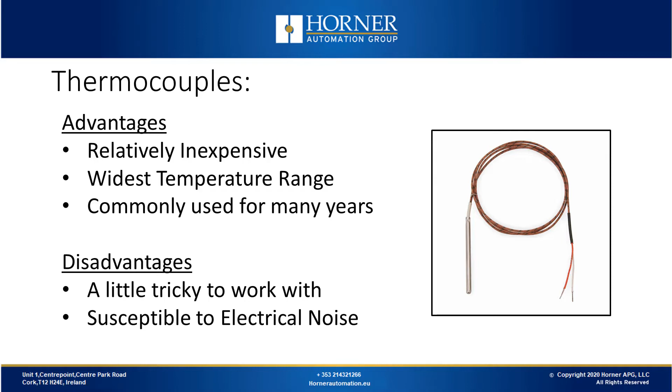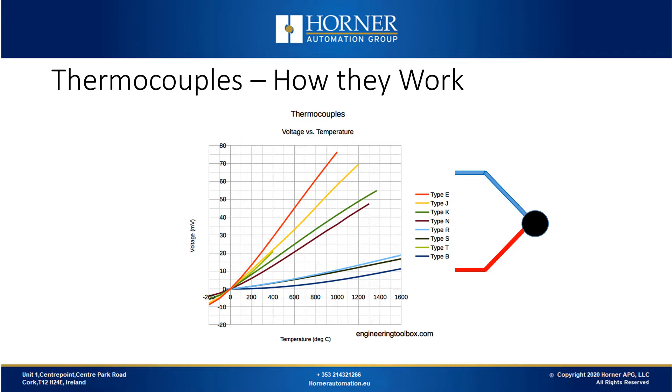If we look at this voltage versus temperature curve, we've got many types of thermocouple listed. When you have a different combination of metals, you have a different type of thermocouple. Different types have been created for different applications, some for really hot applications, or nuclear applications, etc. Some of these curves are very shallow, and you don't have a large millivolt difference to represent a difference in temperature. That's why different thermocouples are supported for different applications.

How would we connect a thermocouple to a PLC or to a Horner all-in-one controller's I/O? Well, we take a thermocouple probe and we would connect it to the terminal strip on the I/O block and measure the voltage. It seems simple, right? The problem is, when you connect metal A to the plated metal on the terminal strip, you have the thermocouple effect of metals, where a small voltage is generated depending on the temperature of the terminal strip. That's called cold junction compensation error.

The cold junction is where we connect our instrumentation in our I/O module. The hot junction is where we do our measurement for the actual temperature. With cold junction compensation, we have to measure the temperature of the cold junction terminals, and based on the thermocouple type that's in use, we predict the voltage loss at that temperature at each terminal. Then we subtract that from the total voltage, and we have the resulting voltage at the hot junction. We convert that voltage to temperature with a lookup table or a polynomial, and we get our temperature.

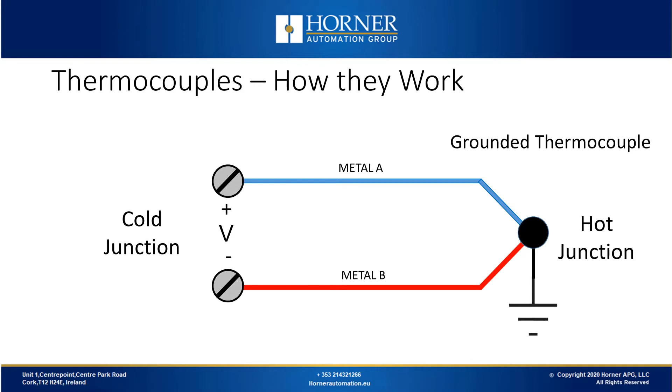If the hot junction that you're measuring is not insulated electrically from the metal sheath in which it's installed, then it's a grounded thermocouple. If the sheath is insulated from the hot junction from the metal tip, then it's an ungrounded thermocouple. Because the voltages are so small and they can be susceptible to noise, it's important to look out for grounded versus ungrounded thermocouples. Not all instrumentation supports both types. At Horner, we have some I/O options that support grounded thermocouples, and we have some that don't. The XL Model 5 and SmartBlock support both. The XL Model 6 and SmartRail only support ungrounded.

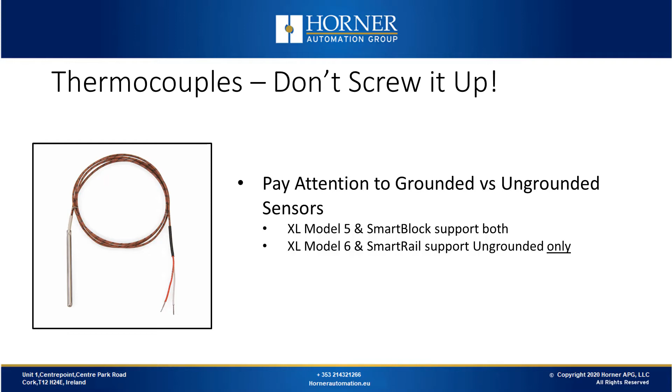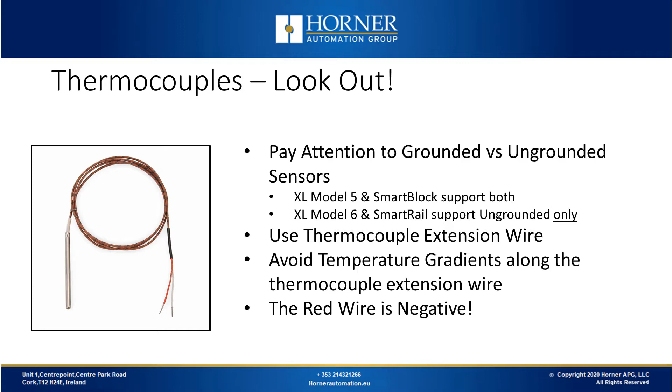If you buy a thermocouple probe, it's going to come with maybe a meter or two of actual wire, and that's not going to reach your I/O module on the back of your controller. You need to extend it using thermocouple extension wire. If you decide to have extra terminal blocks in the signal path, then make sure that every intermediate connection uses special thermocouple type connections. Make sure there's no crazy temperature gradients along that extension wire, as they will cause inaccuracies. There are different colors on the positive wire for each thermocouple type. However, the red wire on all different thermocouple types is negative.

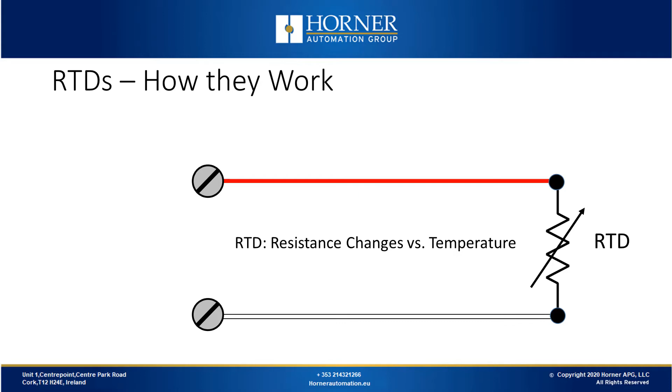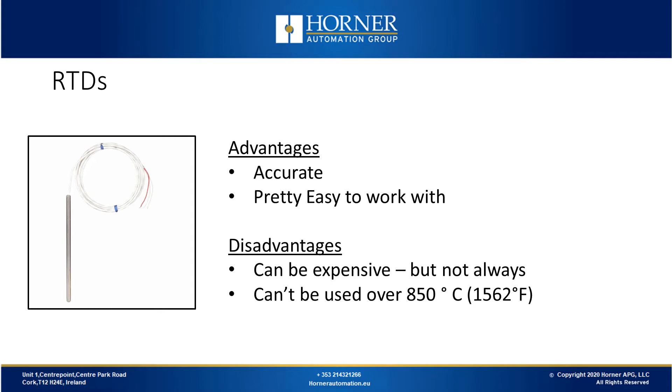Now let's talk about RTDs and how they work. RTD stands for Resistance Temperature Detector. The resistance of the sensor changes with temperature. Let's discuss the advantages and disadvantages of RTDs. RTDs are accurate and pretty easy to work with. They can be expensive, but there are many good quality RTDs at a regular price. They also don't have the extended temperature range that a thermocouple has. RTDs are the most popular sensor type among our customers.

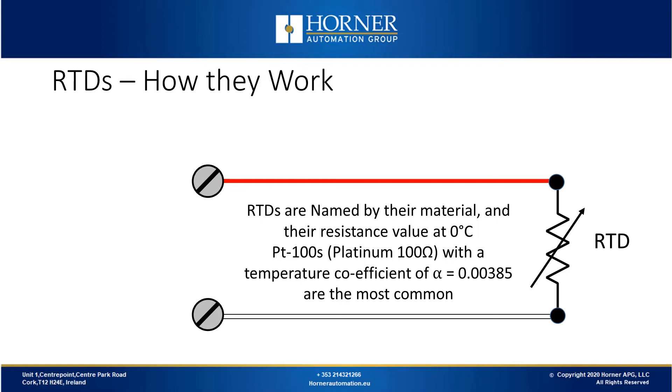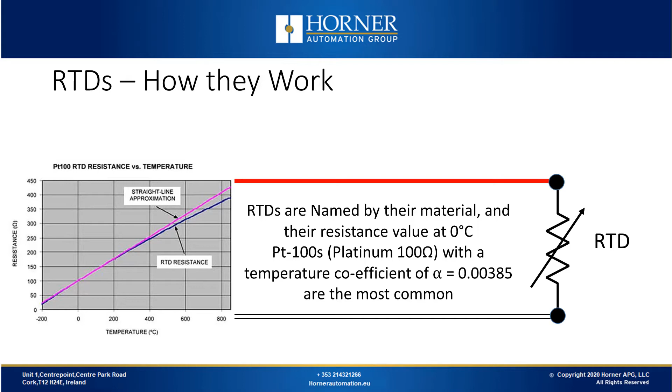Just like with thermocouples, you have different types of RTDs. The most popular is PT100, which stands for Platinum 100 Ohm. If you're looking at multiple options for Platinum 100 Ohm, you want to use the DIN standard, which has a temperature coefficient of 0.00385. There are many others, but PT100 is by far the most popular choice. If we look at resistance versus temperature, we've got around a 1000 degree range for RTDs. Over that range, you've got about a 400 ohm variation in resistance. We have an RTD where we're measuring temperatures around freezing.

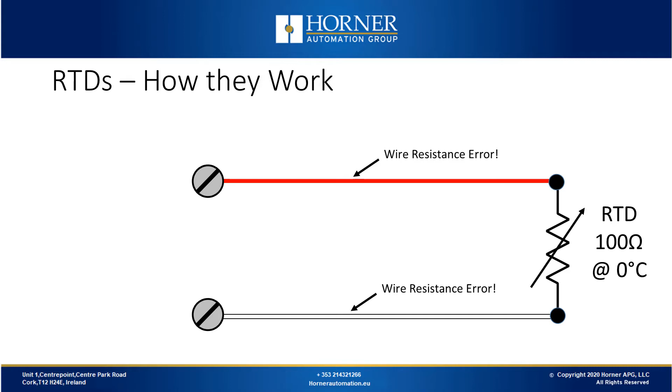If we're measuring temperatures in the ambient range or colder, we're looking at 100 ohms as the value of the RTD sensor. If we have 2 or 3 ohms of wire resistance between the probe and the I/O module, there may be a degree or two of error. While you don't have cold junction compensation with RTDs, you do have lead wire compensation.

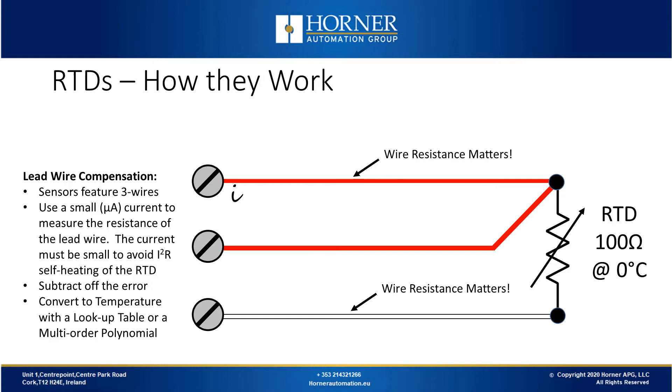Once the resistance of the lead wire is calculated, then each wire is assumed to have the same resistance value, which is subtracted off. And now you're left with the actual resistance of the sensor itself, which you can convert to temperature using a lookup table or polynomial. The small current that is sent down the wire by the I/O module must be small to avoid self-heating.

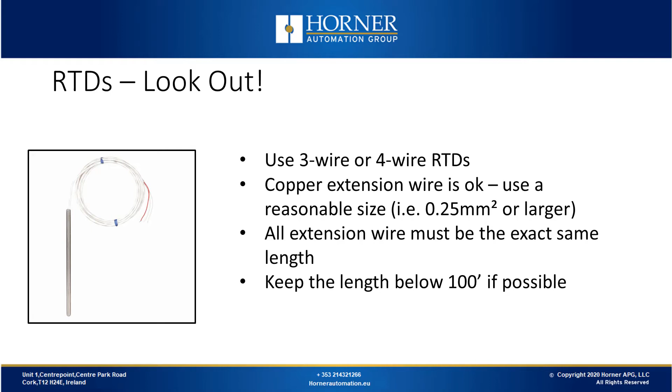It's critical that all extension wires are exactly the same length. If there's differences in the length of the extension wire, then you're going to get errors. And as a rule of thumb, you want to keep the wire length below 100 feet.

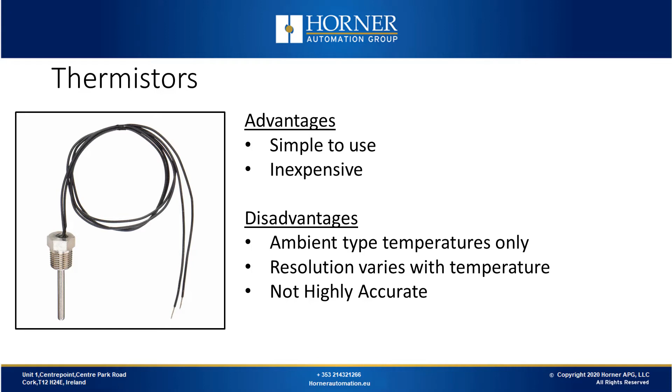The last temperature sensor we're going to look at today are thermistors. Thermistors vary their resistance with temperature, but the resistance values are higher. The advantages of thermistors are they're very easy to use and they're inexpensive. However, they're only good for ambient type temperatures, and their resolution varies with temperature, so they're not highly accurate, but they do a pretty good job in certain applications.

So, with thermistors, the lead resistance of the wire connecting our probe to our module is not important. Thermistors are typically 2-wire devices, temperature range is quite narrow, and resolution changes significantly with temperature. You need to select the right type of thermistor, and there are a lot of different types.

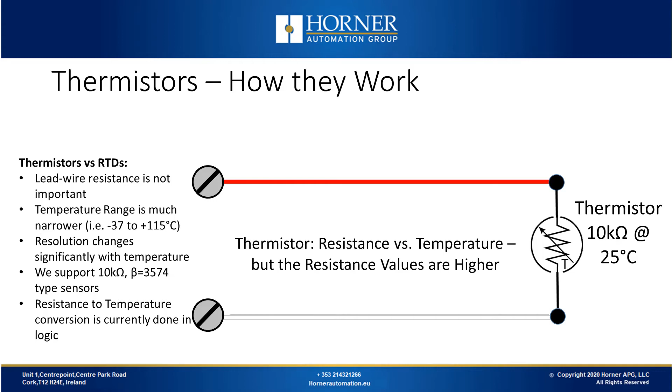The types of thermistor that we support have a resistance of 10k ohms at 25 degrees Celsius, and they have a beta of 3574. The resistance to temperature conversion is currently done in logic. If you pick the right sensor, and you get the right conversion routine that we provide in our documentation copied into your logic, then you're smooth sailing.

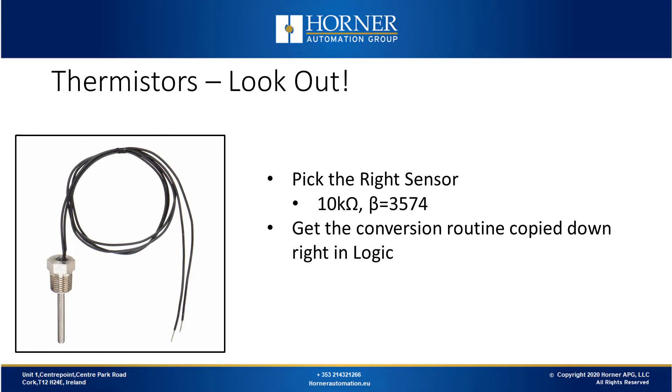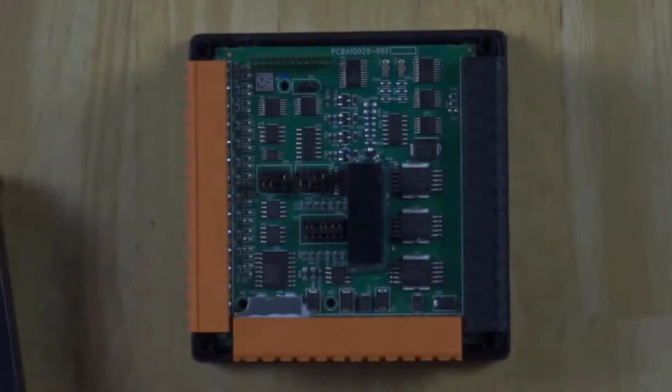Now I'll demonstrate how to configure and wire a Horner OCS for each sensor type. I have an XLE Model 5 here. Now with the Model 5, the first 2 channels of analog support thermocouples, RTDs, 4 to 20 mA and 0 to 10 volts, with the default being 4 to 20 mA. If you want to change to thermocouple or RTD, then you have some jumpers that you need to move.

The jumper for analog input channel 1 is here, and the jumper for analog input channel 2 is there. In this case, the default for both is set for 4 to 20 mA. If we look up the documentation, which I won't show here, you'll see that if you want to support thermocouple, these 2 jumpers need to move to the bottom. So all 4 jumpers are at the bottom for thermocouple. If you want to support RTD, you move these 2 jumpers up. So all 4 jumpers are at the top for RTD.

You'll notice this bar here at the bottom that seems to be epoxied to the terminal strip. That's an isothermal bar. Underneath that is a temperature sensor, and that thermal bar is bonded with the terminal strip. So if we're measuring thermocouples, we can do cold junction compensation properly. Okay, so that was the Model 5.

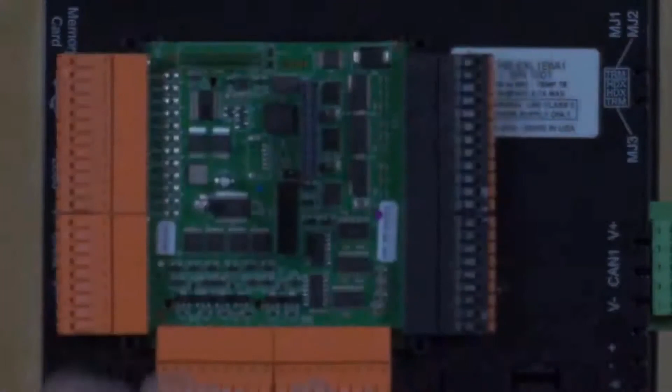Now I'll show you the Model 6. This time, I'll show it in the back of a 6-inch unit. You'll notice that there are no jumpers, there's just a header for expanding I/O internally. You'll also notice that there's no isothermal bar. That's because we're using tiny temperature sensors located at the appropriate points on the terminal strip where thermocouples might be connected. So we're still doing cold junction compensation.

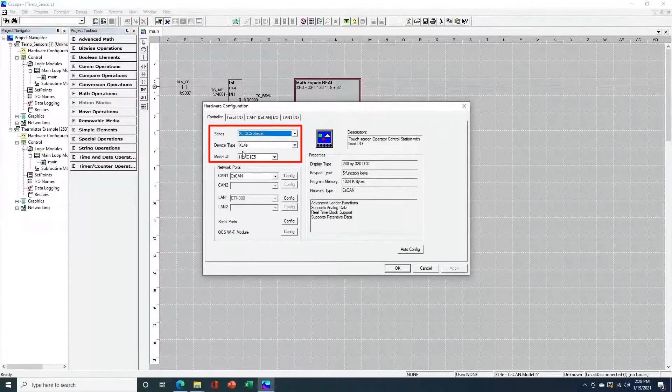Now let's jump into some Cscape configuration. I'm going to pull up the hardware configuration option in Cscape. Alright, what I have here is an XL4 Model 5, and I'm going to configure channel 1 for a thermocouple. So I'll go under local I/O, then config, and then module setup. Under analog in, I have 2 channels. Whenever the Model 5 has 2 analog input channels, default is 4 to 20 mA.

But if I want it to be a thermocouple, I'll move the jumpers as appropriate and then select the thermocouple type from this list. So let's say I select K-type thermocouple. It specifies 1/20 with degrees Celsius as the units that will be reported through the analog input register. I will do the same thing with channel 2. The channels can be completely independent. I can make it whatever I want, but I'll set another K-type thermocouple here.

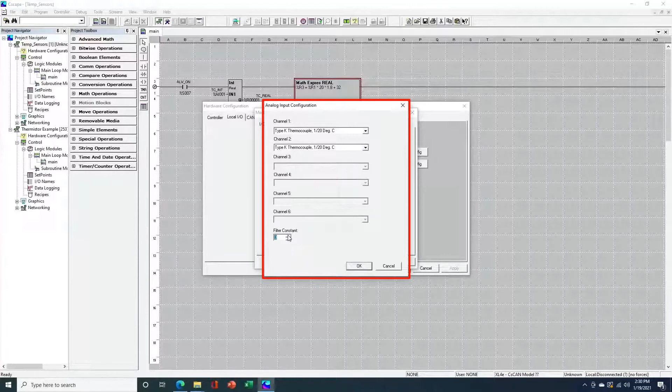We also have a filter constant. I typically recommend you set the filter constant to a value of at least 3, unless you're looking for extreme speed. Thermocouples have a very low signal and are somewhat susceptible to noise and transients, so this filter value can be set anywhere between 0 and 7 to filter that noise. So that's how I would configure a Model 5.

The temperature values are coming back in 1/20 degrees Celsius increments. If I wanted to see those degrees in Fahrenheit, I would take the raw analog input value that comes in as an integer. I'd convert that to a real value and store it in a variable that I've called tcreal. And then I'd do a math expression, where I'd take the 20th degree increments, divide by 20 to get 1 degree Celsius, and then, using that, do the standard degrees Celsius to degrees Fahrenheit conversion, which is multiplying it by 1.8 and then adding 32. So that's a simple way of doing the conversion from Celsius to Fahrenheit.

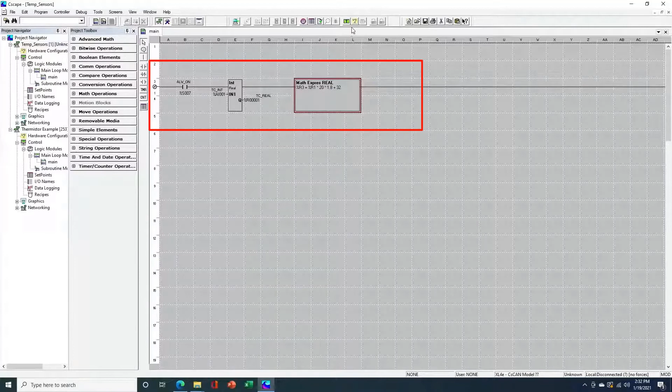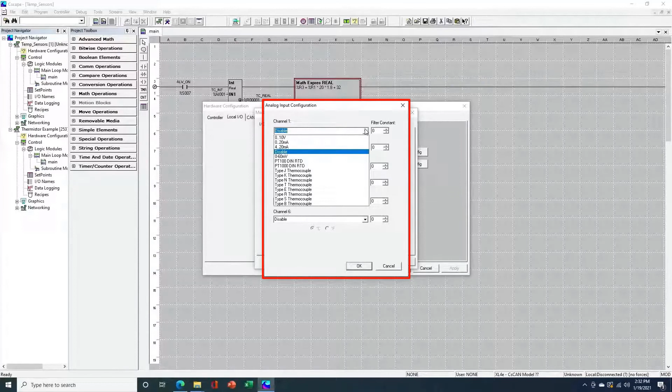Now let's look at the Model 6 configuration. So I'm going to select the Model 6 here. I'll then go back to the local I/O tab, then go to config, then module setup, and analog in. Okay, it's very similar but a little bit different. You have a few more types available. We have PT1000 curve here, which I'll select. The filter constant is available on a per channel basis, and you can choose whether you want to report in degrees Celsius or Fahrenheit. We also report it in 10th of degree increments instead of 20th of a degree increments.

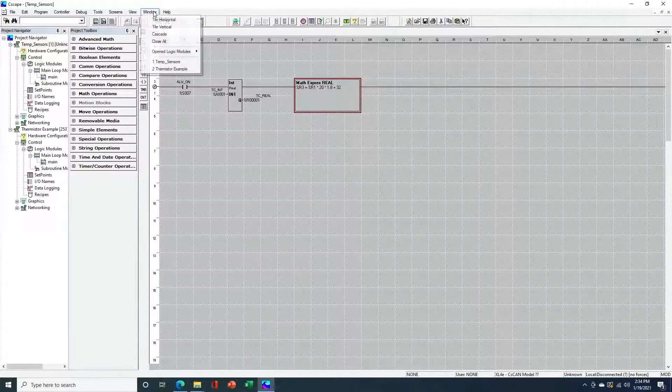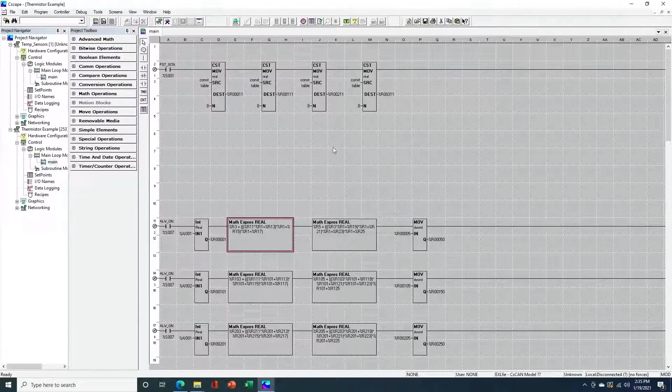Lastly, I'll show you an example program for thermistors, so let me pull that up here. Okay, now this looks a little bit complicated, but it's not really. At the beginning, it's moving constant tables into specific locations that are doing part of the conversion process. So each of these are for 2 channels, and these values from the constant table are in the thermistor supplement documentation. Basically, it's using these values as a reference to calculate the thermistor curve within the 0 to 10 volt signal. For the hardware configuration, you need to set the analog inputs to 0 to 10 volt.

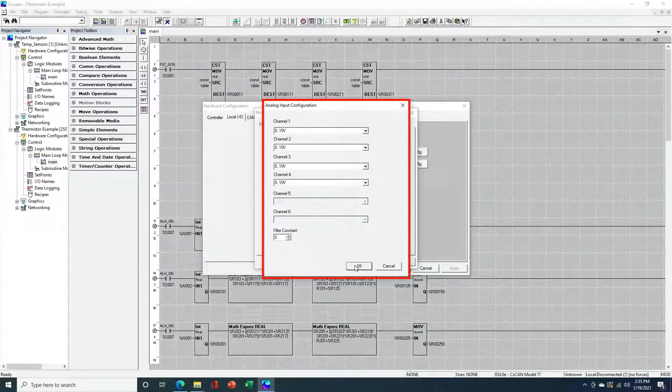If you click under the local I/O, then type 2, module setup, analog in, you'll see that for thermistors, we've set them up for 0 to 10 volts. If you set these to 0 to 10 volts, and then you execute these polynomials which we've given you, then it's going to give you the appropriate temperature for each channel. This is example code that you can get from Horner, and there's a complete write-up on it. We've also got documents detailing all of the steps in converting from voltage if you're using thermistors.

Thermistors are available for the Model 2, 3, and 4. The Model 2 has 12 digital in, 6 relay out, and 4 analog in. With the Model 2, you can get 2 of the 4 channels converted to thermistor at the factory, or 4 of the 4 channels converted to thermistor at the factory. The Model 3 and the Model 4 I/O options have 2 analog input channels each, and if you get the thermistor option, both channels are configured for thermistors. So that wraps up our demonstration for today.